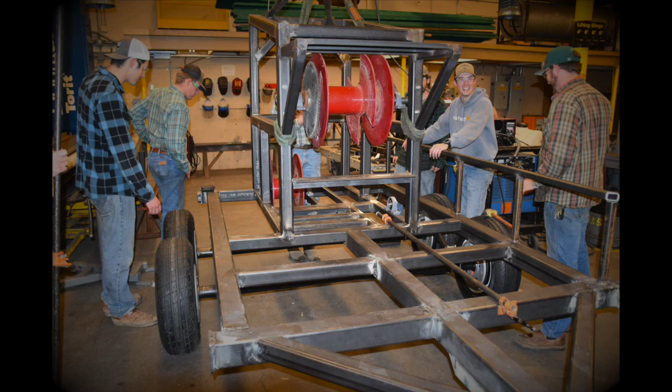According to the CDC, 780 million people worldwide do not have access to clean water. The company Aquifer is dedicated to bringing clean water to rural communities around the world. Groundwater is a sustainable solution that provides clean drinking water to these communities.

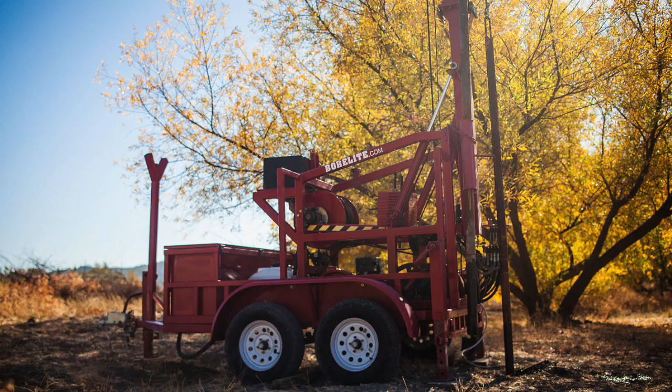Aquifer is developing the Borelite drill in order to utilize this resource. This drill is designed as a lightweight, long-lasting cable-tool drill that fits on the back of a utility trailer. The Borelite design allows the drill to travel to a remote location where conventional auger drills cannot easily access.

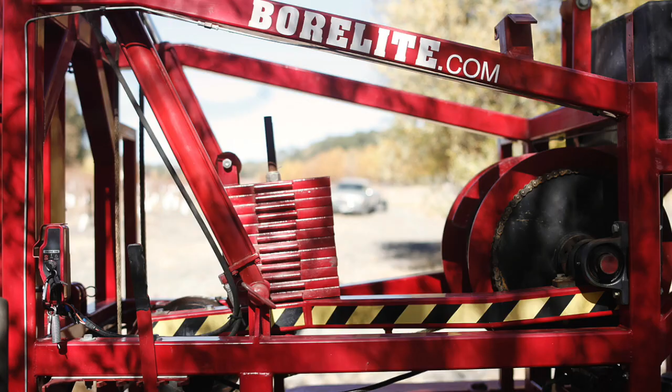The Borelite drill offers a simple, portable, and inexpensive solution to the water crisis in developing countries. The drill can be maintained and operated by a person with minimal training. There is no documentation for the current Borelite drill.

The lower Borelite team's goal was to build a robust, low-cost, low-tech trailer that will support the drilling boom and mechanical components. Design a trailer to fit 3 into a standard 40-foot shipping container. Design the trailer with a desirable tongue weight for a Toyota Hilux truck.

Create a hitching system that can be removed and replaced easily. Develop detailed build plans for production. Work together with the 2 Borelite teams. And most importantly, deliver clean water to people in need.

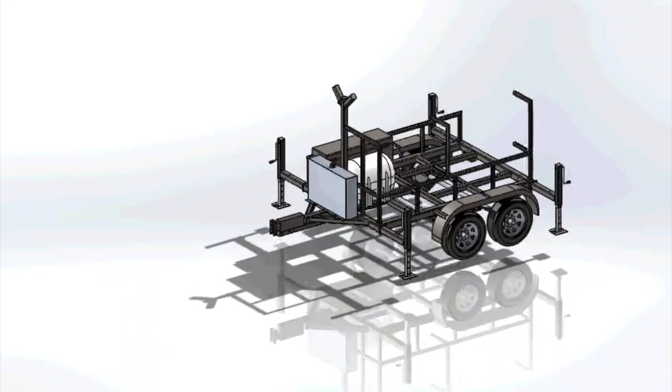The trailer frame was constructed using both 4 and 3-inch square tubing for ease of fabrication.

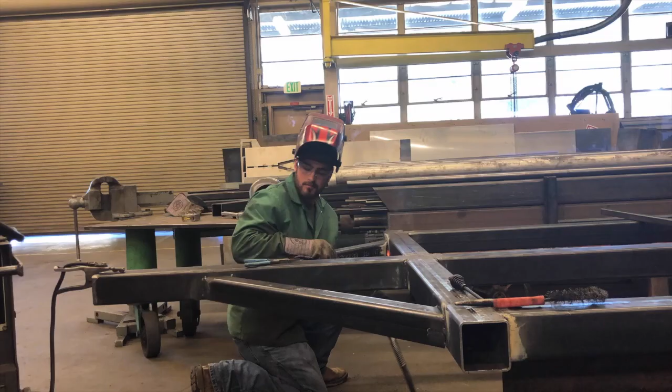In this stage, you can see us doing the final welds and preps to the tongue of the trailer. This process required us to align the tongue with the frame in order to have everything in line with each other.

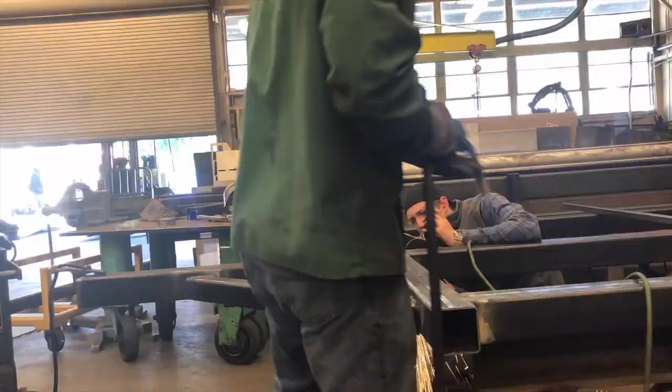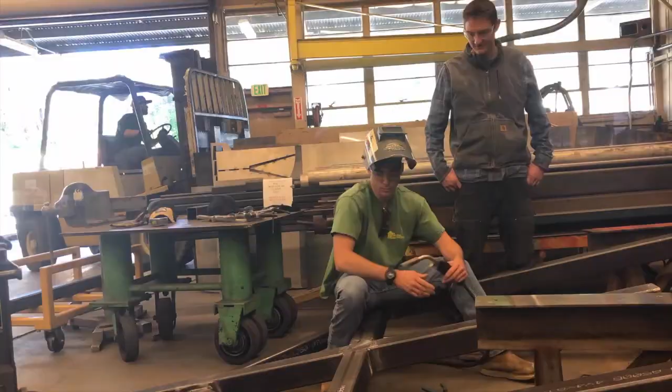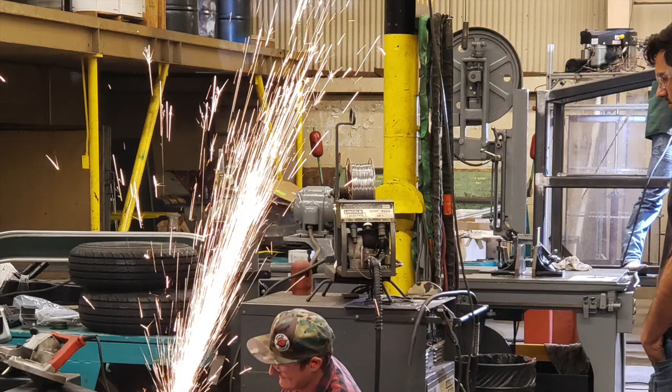After looking at the total length of the trailer, we realized we had to shorten the tongue. Shortening the tongue required a handheld grinder to cut through the beam of steel because a bandsaw cannot be used to cut the trailer tongue with it fully built.

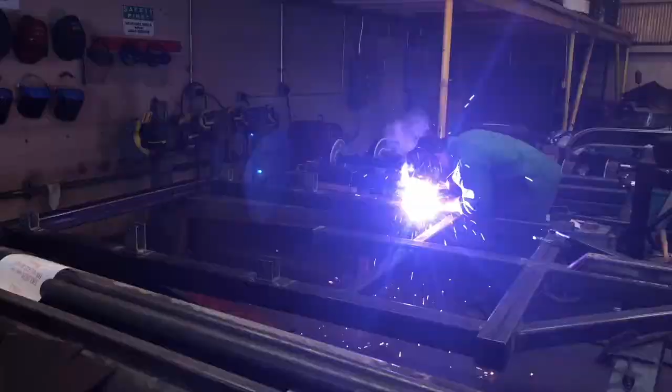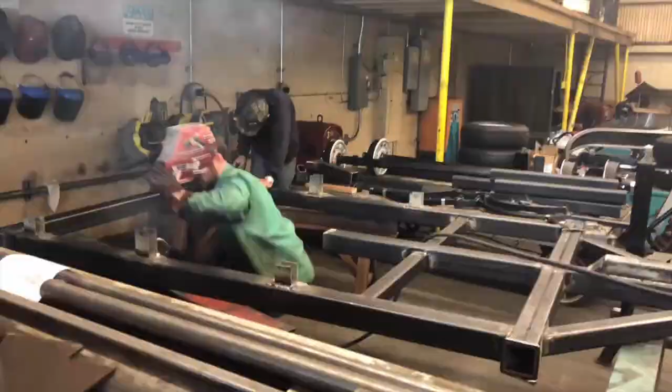Before the axles and the leaf springs could be mounted to the trailer, the hangers had to be welded onto the frame. The hangers were welded on using the dual shield welder, and they were spaced by putting the leaves inside the hangers, mocking up the axles, making sure the axles were square, and then tacking the hangers and then welding the hangers. As you can see in the video, each hanger was welded at different points, and we left space before we welded the hangers on all the way, just to make sure that the frame didn't warp.

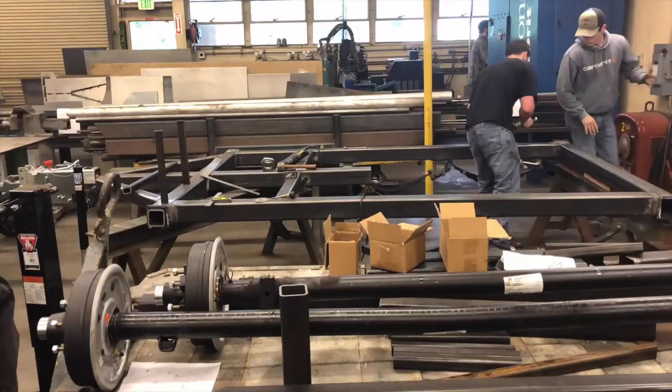Once the hangers were welded to the frame, the leaf springs and axles could be mounted to the trailer. This portion of the video is showing the leaf springs and then the axles being mounted to the trailer. And then after this was all complete, the axles were measured to make sure that they were still square to the tongue.

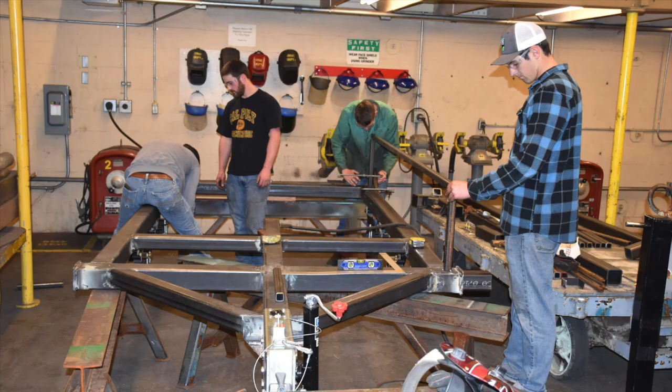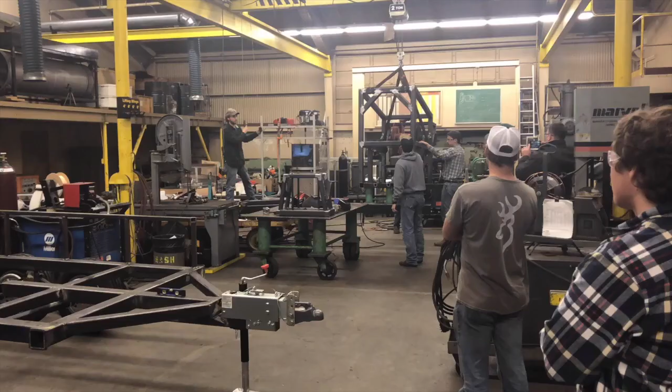Once the main portion of the trailer was complete and we had a rolling chassis, we started to build the railing. Once the trailer chassis was rolling, we were able to incorporate the middle portion of the Borelite trailer into the trailer frame. With tolerances less than 1/8 inch, we were able to gently maneuver the middle frame into position.

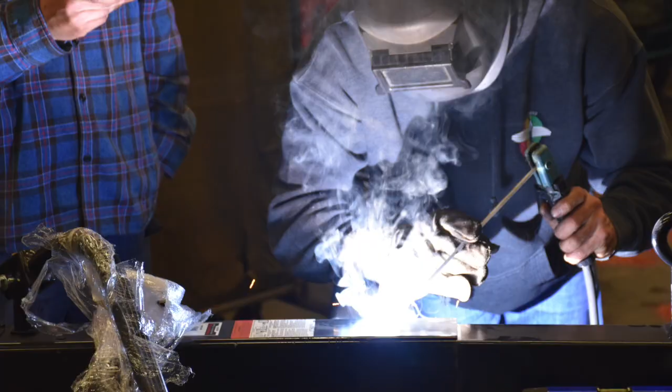The jacks were mounted to the trailer by welding the jacks perpendicular to the 3.5 inch tubing. This tubing then slid into the 4 inch tubing of the frame, which allowed us to extend the jacks during operation.

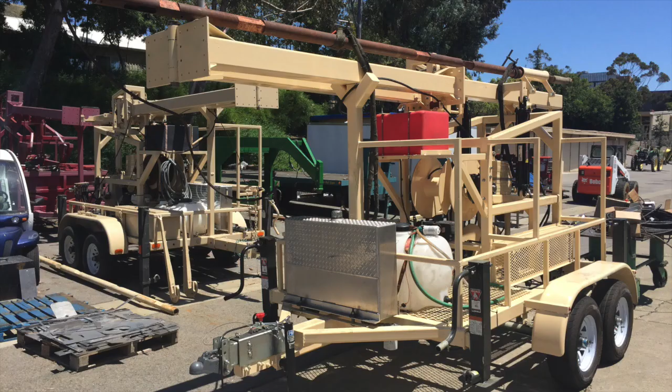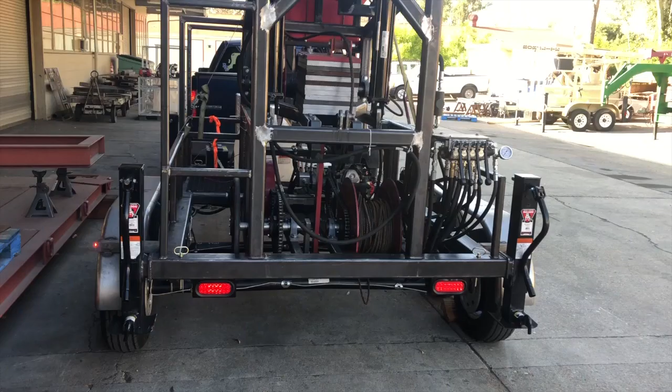The first part of testing required us to make sure that the lights were working properly. In this video you can see that the brake lights and both turn signals and running lights were operational before we took the trailer out to be tested in the field.

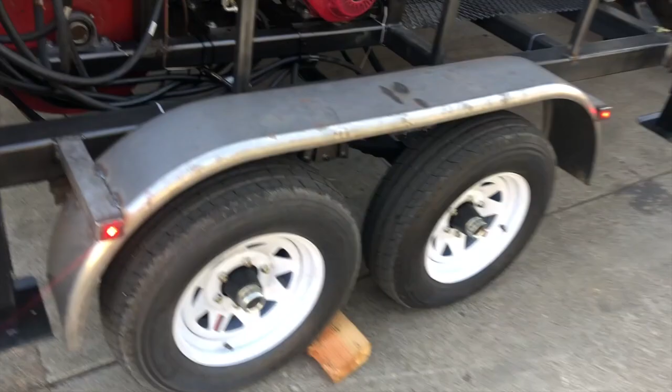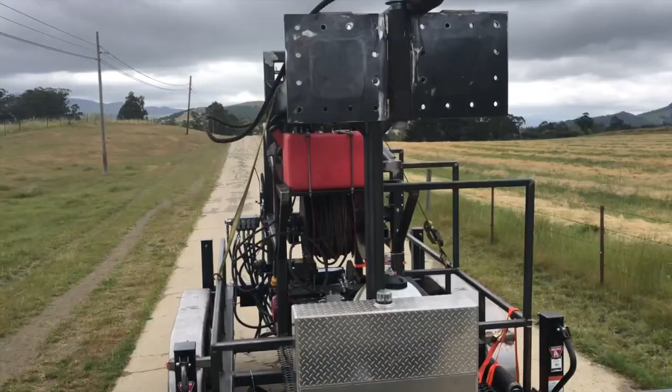To simulate the operating conditions where this trailer will be located, we decided to take the trailer to an isolated location for testing. Another important part of testing was making sure the trailer can handle off-road and high-speed conditions. Based off this video, you can see that the trailer handled remarkably well and was an improvement on the previous trailer design.

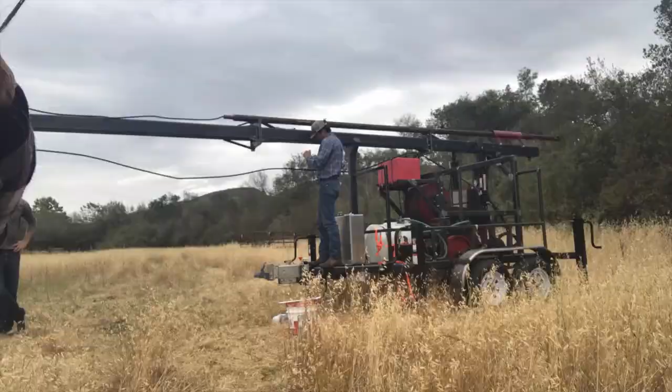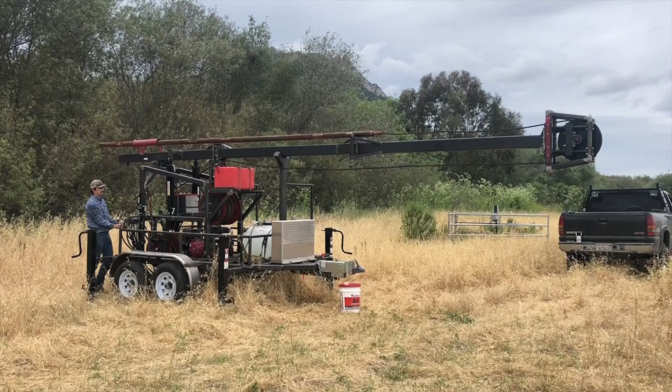In this portion of the video, the mast of the trailer is being raised to the drilling height. As you may have noticed, the truck has to be disconnected so that the mast can be fully extended before it's raised up. During design, this brought up some worry that the speed and momentum of the mast going up would make the trailer pop a wheelie.

Nonetheless, during testing, we decided to raise the mast slowly, and we found that there was no issue with momentum adjusting the position of the trailer.